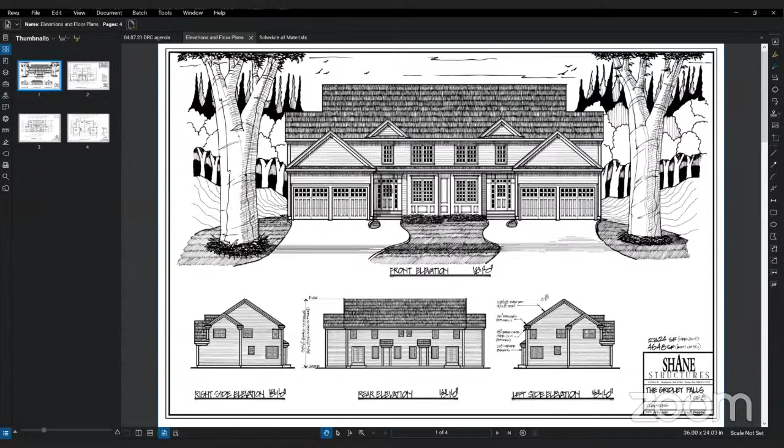Is my screen visible? Yes. Okay, you can see the drawings. Great. Do you also have the site plan, Diana? I can bring it up. Yeah.

So do we have Brian Waterman and Hamid available? Yes, and then there was a phone number in the waiting room that's no longer there, but I don't know if that was part of the applicant's team.

Good morning. Good morning. Salam alaikum, Hamid. Alaikum salam, thank you. So is Brian going to join us? I believe so. Yeah, it says he's connecting now. He may be having some connection issues.

So Hamid, Brian sent us some photographs of the site that showed standing water in the northwestern corner of the site. Has he discussed this with you, how to mitigate that? The water and stuff, correct. Yes, yes, we'll be taking the appropriate measures for that, correct.

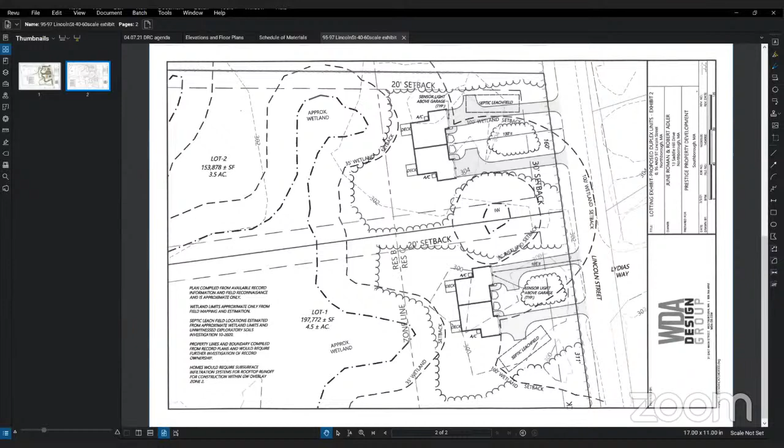So if there is a modification to this site plan that affects the duplex placements and septic leach field placement, we would need to see that before we could give a final approval. Sure, yeah - this is preliminary stuff without final design, obviously. I think it seemed more to figure out what kind of style house would go there, colors and things like that. But obviously we need to do more engineering and testing to really nail down a design plan.

Okay. Anybody else have any questions? Nope. So now we could go to the building design.

So we received some updated exterior elevations and floor plans and also a materials list. Hamid, did you want to take us through that?

Sure. So the last time we presented, the floor plans weren't included. I believe it was David who asked to see them, and it's part of your design review guidelines to have them, so they are included here. They are reflective of what we're going to be building at these properties. I'm not sure if there are any specific questions you have on the layouts or the elevations.

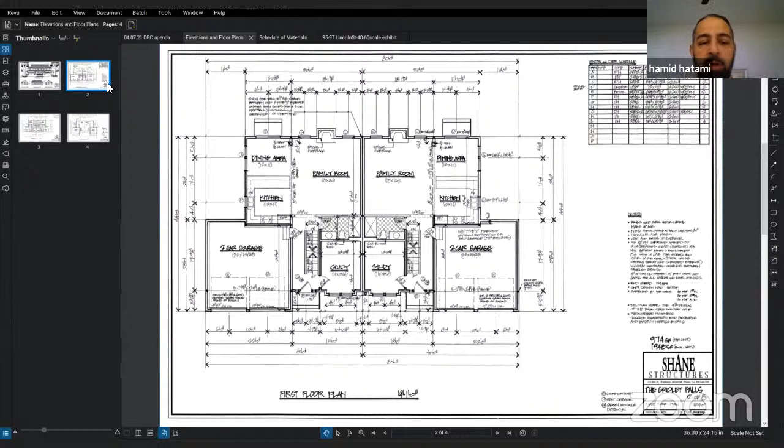I think exterior wise, they're the same, especially the facade. The only thing was on the rear of the house, the site plan was already reflective of where the patio was going to be, but the elevation had the patios on the party wall between the two buildings. They are separate, so the rear elevation hadn't been updated last time, and it is now.

So you showed that one building was going to be gray and the other brown. Do you have any color samples? Yes, so what I did was in the schedule of materials, I provided links to the websites that have the exact colors and materials. I gave the specific colors, separated by two pages, duplex A and duplex B.

So is this a smoother textured siding you're proposing? It's the HardiePlank, it's got some texture to it, slight texture. Can you get it smooth? To be honest, I'm not sure, I'd have to find out.

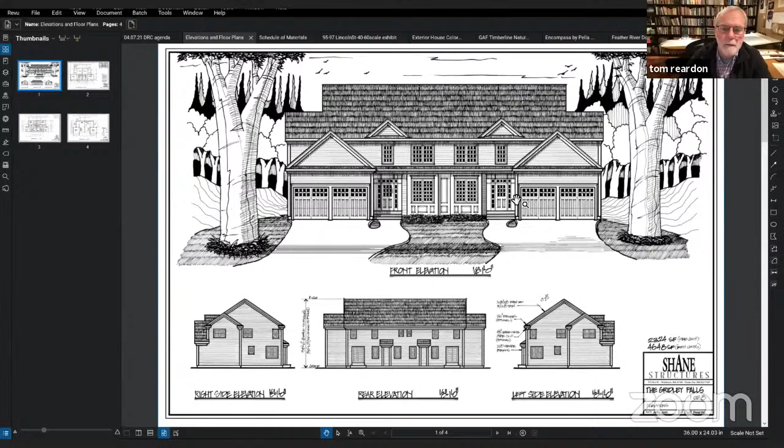Next item, or is there any more commentary on that? So I'll swap the front doors to ensure that they're 9 light, as you see there, with the side lights. That's a simple change to keep the exterior more consistent, as you said.

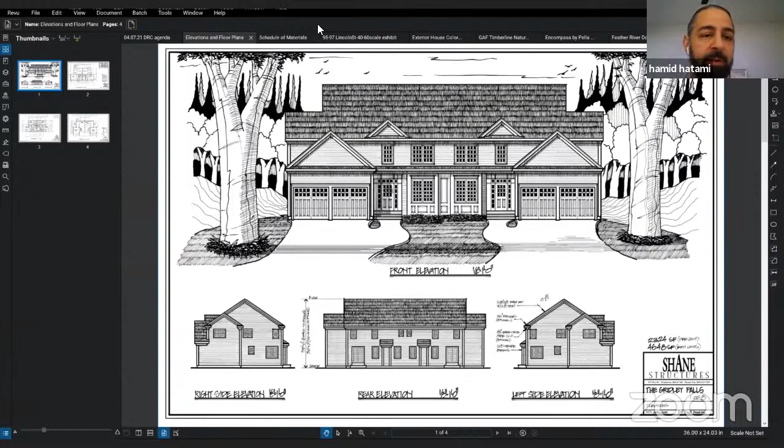And are the garage doors going to be like they're designed here? Are they going to look like that? They're a craftsman style door, so yes, they're going to have the details on the bottom as well as the glass inserts on the top. I use a Haas door.

Oh, that doesn't look like that one, not like that one. Let me see if I can get it up on my web browser though.

So again, Hamid, if you're mixing colonial architecture with Art Nouveau front door and craftsman style garage doors, you're getting a stew of styles. So look at your building and try to get the accent pieces to be consistent with the overall architecture.

Okay, I was on the previous Zoom meetings, a couple of them, and the other gentleman had the same facade, and I figured that this look is the same as theirs, believe it or not. I thought that it was a look the town was more looking for, especially when we started talking about throwing some, for example, the decorative handles that were on the doors I typically installed, and that was met with, it wasn't viewed very highly. So I figured this was something you guys wanted to see, but if it's not, I'll gladly change it.

Well, it's not that we're looking for a specific style. We're just looking for the quality of your design work to be internally consistent, and not be in the candy store picking one of these and two of those and just kind of throwing it together. We want the integrity of your design to work. Understood, and just by controlling the details, you're able to get a stronger looking building.

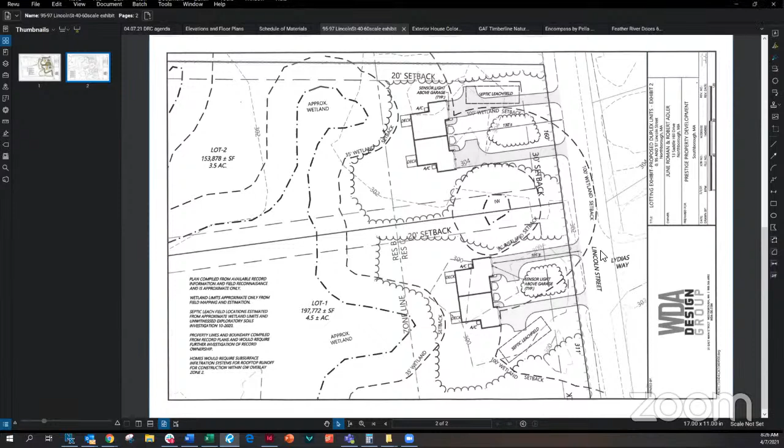And is there some reason - we're doing the light plan, correct - why you didn't want to put a lamp post on both drives when it's 150 feet of length, like a small white lamp post? There's street lighting, if I'm not mistaken, and none of the other properties in the neighborhood have it, so it's a little out of character. The reason I didn't go with a recessed light or wall sconces above the garage was because one building is 130 feet off the road and one's 100. I figured those sensor lights provide enough luminance when they're driving up, as they get off the road and lose some street lighting, the sensor light would pick them up and illuminate the driveway without causing disturbances to traffic on the street.

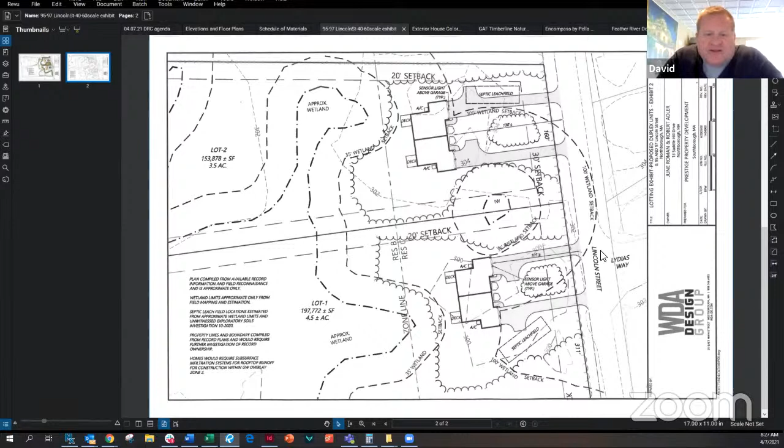I know there's not much on landscape, nor is there really anything for us to go by, but have you thought about doing any beds behind the two decks or on the side of the homes? To be honest, no - I wanted to keep as much yard space available for the homeowners as possible. With the amount of wetlands in the back and the amount of tree cover we're leaving, some units don't have as much backyard space, so they may have to use their side yards more.

Again, these are 4-bedroom units - I'm expecting families with children to move in, and the more yard space they have the better, whether they want swing sets or trampolines. I was thinking in terms of the HardiePlank going down the side - a lawnmower or weed whacker could damage it - so running a bed of a foot or two, whether stone or something, along the sides just for protection of the HardiePlank.

Typically the foundations are about 18 inches off, so a lawnmower wouldn't hit it, but I get the point. I can look into putting either a slight bed of stone or mulch beds around. In my typical builds I don't put mulch beds all around because homeowners don't maintain them and weeds grow out of them. Even with fabric down, they die off and people throw grass clippings on top - it looks good when you walk out the door, but after that, not so much.

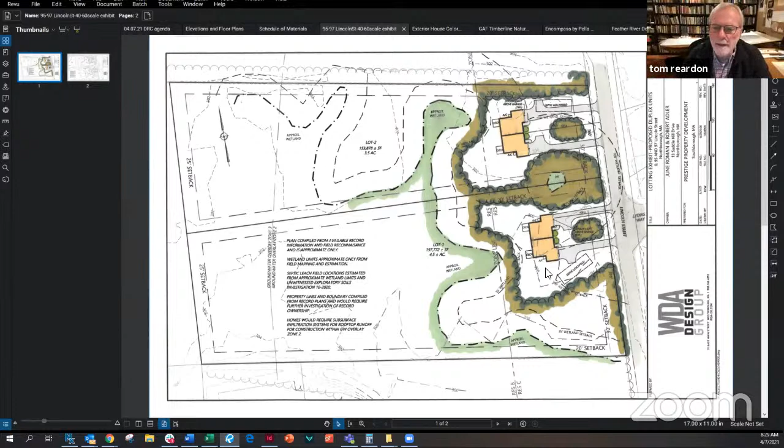And we'll know whether the grades will be affected by the groundwater and the septic location. If you need to raise the system, that will be indicated on the site plan. Oh yeah, once we get to final design and site plan, once we design the actual septic system based on the witness soil testing, then we'd have final grades on the plans.

It's 2 independent parcels, so each parcel is going to be looked upon and operated independently. The leach field or septic system on the bottom parcel has nothing to do with the top and vice versa. But you could have 2 tenants sharing? Yes, that's correct. Like a homeowners association? That's correct. Do they share any other utilities?

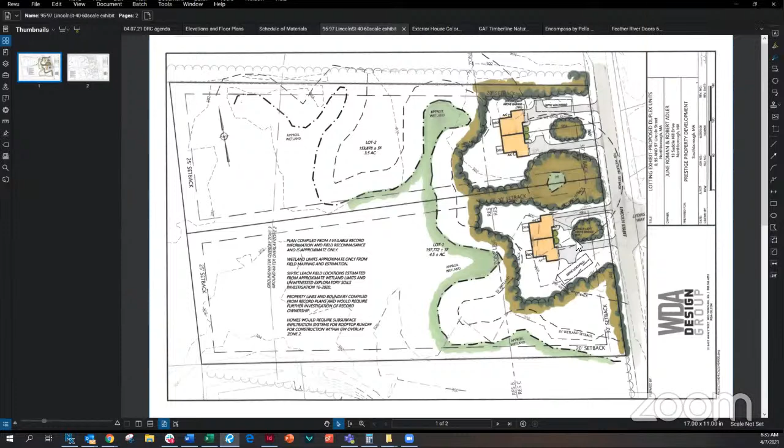So I'm in favor of voting on the building and site design at this time. Diana, I would move to approve that contingent on the wetland survey. Okay, David? I'm in favor. Lisa? It's fine. Okay, so Brian, Hamid, I think we're good with the design layout.

If there's any significant changes to the positioning of the buildings and or the septic system, that we get notified of those changes. Sure. Excuse me, Tom, Bob? Yes, who seconded the motion? Oh, I'll second the motion then. Okay, sorry, that's right. And I also vote in favor of the building and landscape design. Got it, okay.

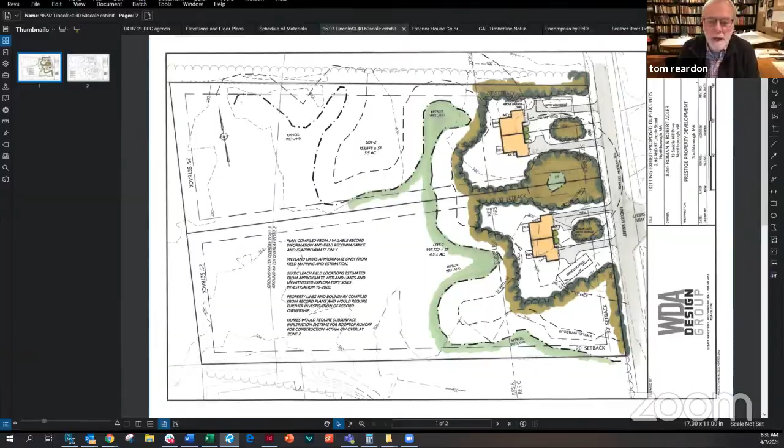So do we need to officially close this discussion? We have a motion? I move that we close this discussion. We have a second here. Second. All right, everybody in favor? Aye. Okay, well thank you very much. And we'll bring Michelle back in and we'll resume our meeting's minutes discussion. Thank you. Bye-bye.

Okay, so the next on the agenda are consideration of minutes. I think I read online that Dave, Tom, and Diana all approved the 3:16 minutes, as well as, did you guys approve the 3:30 as well? And then Lisa, did you get the minutes to review and approve them yet? I did, but I don't have anything to do with the one you first talked about because I wasn't at the meeting.

Okay, the 3:16 minutes, you weren't at that meeting? Okay, right. Has everyone received the 3:30 minutes? I don't think so. I think so. Yeah, she notes 3:30 down here, but I'm not quite sure that we've received them. So why don't we just make a motion to approve the 3:16 minutes, since we all accepted them, except for Lisa, who did not attend that meeting.

And if someone wants to make a motion to approve them and then second it. Motion to approve. I second. Okay, and then I'll just do a roll call. Diana, are you all set on the 3:16 minutes? Yes, approved. Dave, all set on the minutes? Approved. And then Tom, and then myself, yes. Okay, so we've approved the 3:16 minutes. And the 3:30 minutes appears that we don't have, but we'll go back and take a look in our email to see if Kathy has sent them out, and then we can do it for the next meeting.